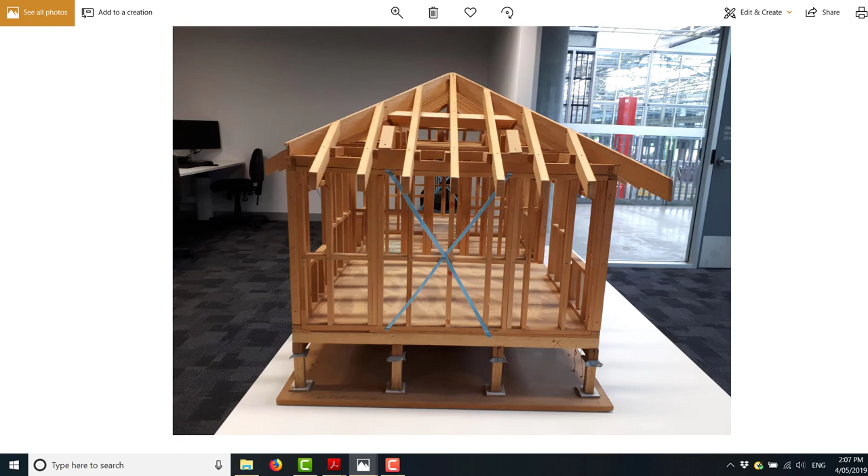Now, you should know this by now. These things here are rafters. These ones are your ridge board or ridge beam. Coming down the corner here, if you remember, the photos are of a hip roof. So this is a hip roof. Let's see if I can find a slightly better photo. There it is, a hip roof. This is a hip rafter, and these ones are your common rafters.

This one here is your hip rafter. What is supporting the hip rafter? Your top plate. From your top plate down to your stud to your bottom plate, that's where your wall framing is. From top plate to bottom plate, anything between, that's your wall framing - the timber component, that is.

Once you get past the wall framing, then you will have your floor, whether it is a platform floor or strip flooring. Then you've got your floor joist, here, this little bit here, which goes the whole length of the building, supported by bearers. Bearers are supported by stumps. Between the bearers and the stumps are ant caps. So the stumps, bearers, floor joists, and flooring form part of the floor framing components.

The last component we're going to be doing is the bracing component. See those blue straps? Those are indicative of metal straps that we will be using for bracing. I'll be essentially teaching you two forms of bracing - metal straps and hardboard sheeting. But we'll get to that later.

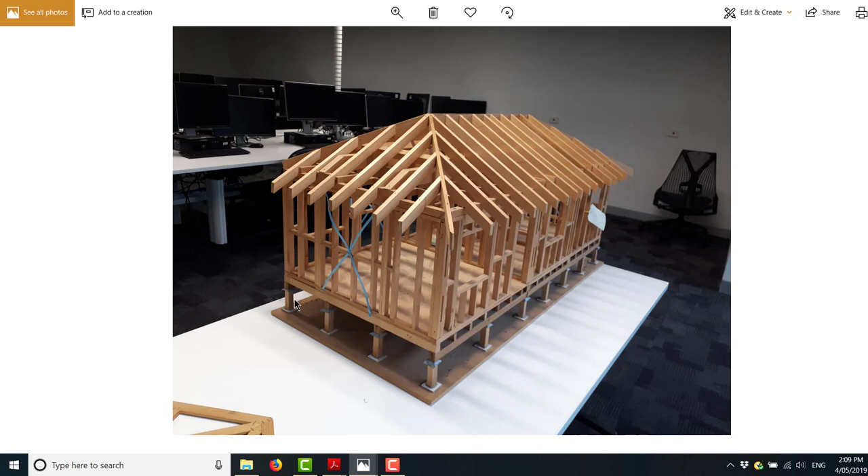Okay, so components of a wall framing. Wall framing starts from the top plate and ends at this bit here, the bottom plate. What I'm going to do is use this timber frame model. I also have photos of a single-story timber frame house and a 2-story timber frame house. I'm going to go through them, give you an idea as to how things work, to put things into more of a practical look. Okay, let's begin.

So we've got the rafters passing on the load to a wall stud, going down to the bottom plate, passing onto floor joists, onto bearers, and onto stumps. The whole point of it, if you remember correctly from our previous chats, is that the load of the roof and everything else is passed down in as much of a vertical manner as you can, all the way towards the ground. Right, so we've got the parts.

Top plate. Top plate always goes around the whole building on all the walls. Bottom plate here is similar, but you do not have your bottom plate where the door is - you'd trip over it, so you don't do that. See how it's in a vertical manner? So I've talked about that.

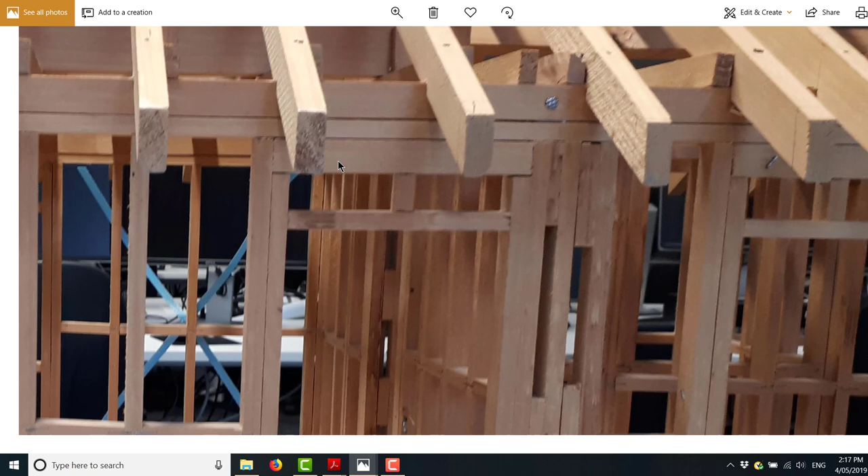The lintel here—how do we support the lintel really well? Using a secondary jamb stud right underneath the lintel. There's always a pair, one and the other. This is called a secondary lintel, secondary jamb stud. Next to the secondary jamb stud, there's the jamb stud.

Again, they come in a pair. This is a jack stud. We call jack anything when it is a shorter piece of what they're supposed to be doing. So this jack stud is essentially a smaller piece of a wall stud. So we call that a jack stud.

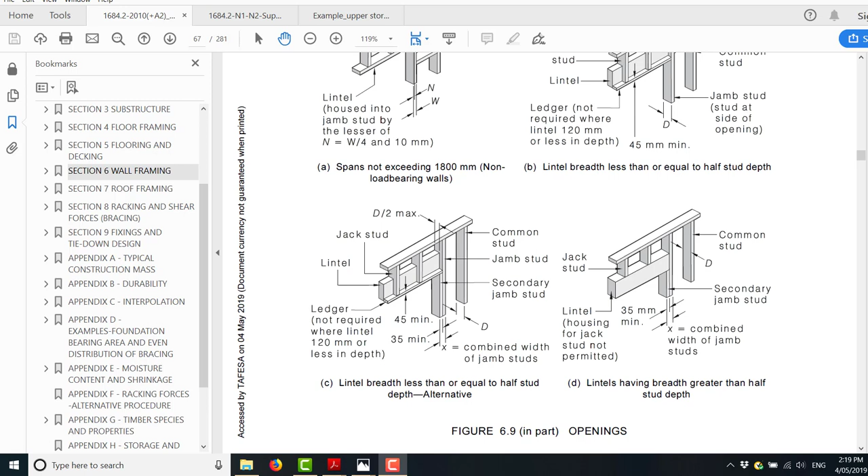And then we've got this bit. This bit is called a ledger. So where do we find the ledger bit? It's here, the ledger, right down the bottom, or it can be called a lintel trimmer.

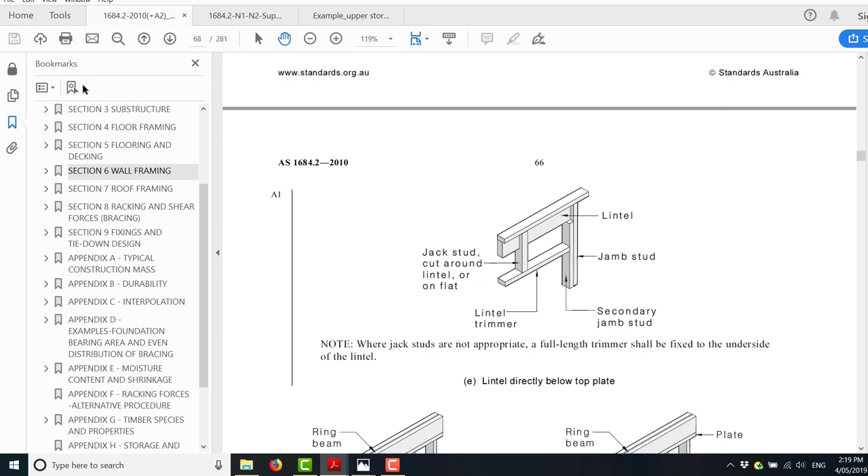So what is what? Go back up to terminology and definition, scroll down. This arrow is what we're looking at—it's called ledger. In the past it's also called a lintel trimmer, so you can use the terms interchangeably.

As with a window, don't know whether you can pick it out, but here's the window. It is similar—you still have to spread the load of the roof using a lintel onto your jamb stud going down.

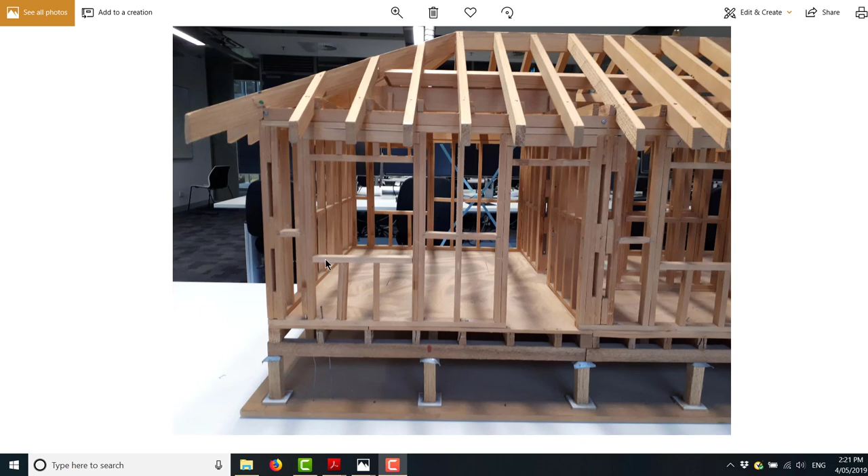Your secondary jamb stud right underneath the lintel, and next to it is your jamb stud. They come in pairs. That's your window sill trimmer, and that's your jack stud happening again. That's your window sill trimmer right there.

Okay, look up a bit. Window sill trimmer, clause 6.3.6.6.4: opening widths up to 1800, the trimmers can be of the same size and grade as the common studs in that wall. If it is more than that, then you look at table 6.3.

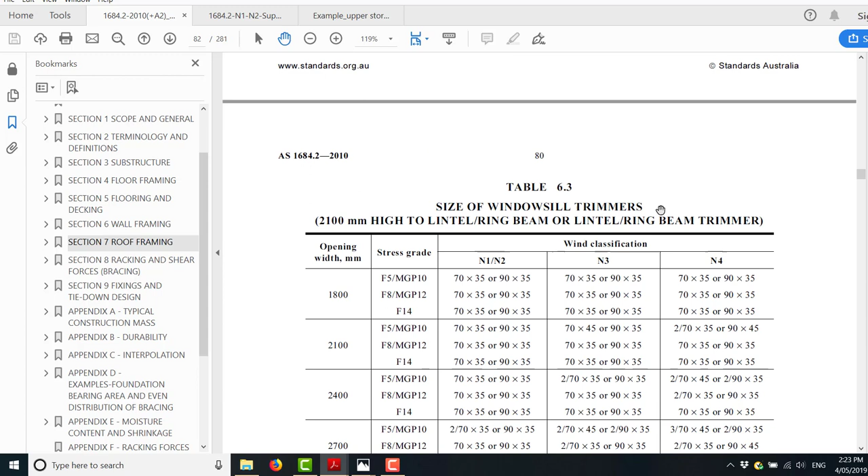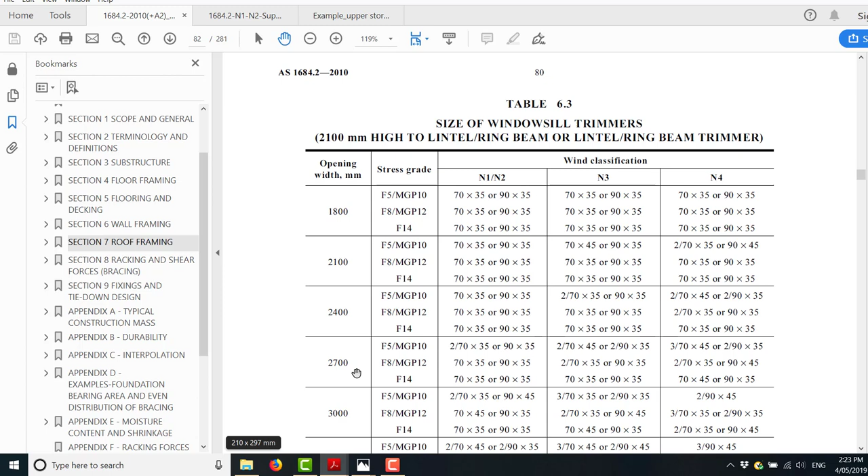6.3, here it is—it covers N1, N2, N3, N4. Assuming that we're sticking with MGP10, as you can see, 90 by 35 can be used for opening width up to 2700. Thereafter, the sizes increase.

Read the table and have a look. You should be aware that your 2/90 by 35, for example, is just two pieces of timber, dimension 90 by 35, and two of them laminated together.

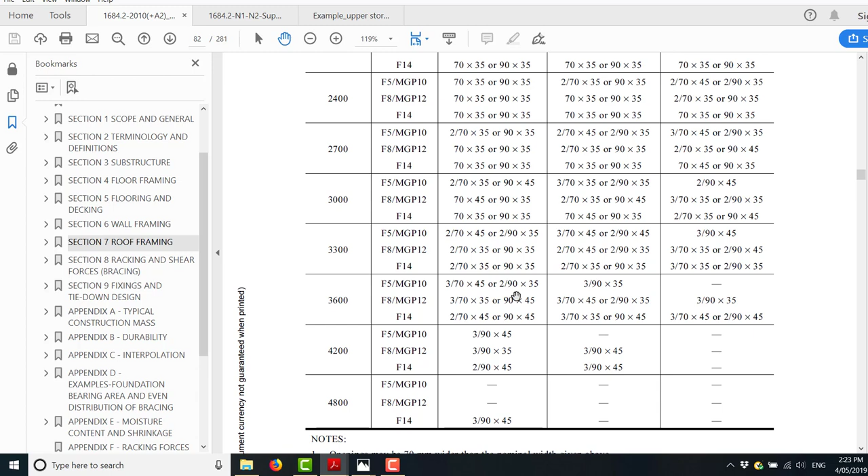Right underneath that, you've got the bearer going horizontally. On top of that, you've got the floor joist. I'm going to zoom in to give you a better idea as to what we're looking at. So you've got your floor joist there.

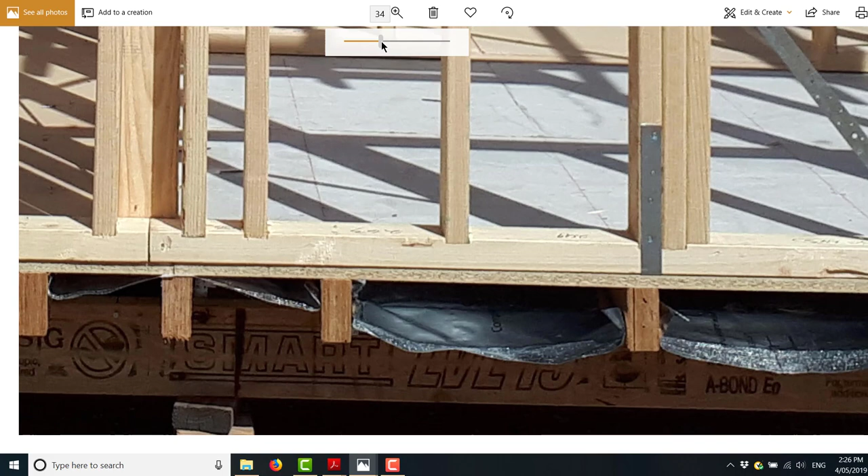Above the floor joist you have your studs trenched into the bottom plate. Zooming in a little bit more—so this is your bottom plate. In this case, the bottom plate has been trenched. Trenched means making a little channel into the piece of timber all the way through to the depth of it.

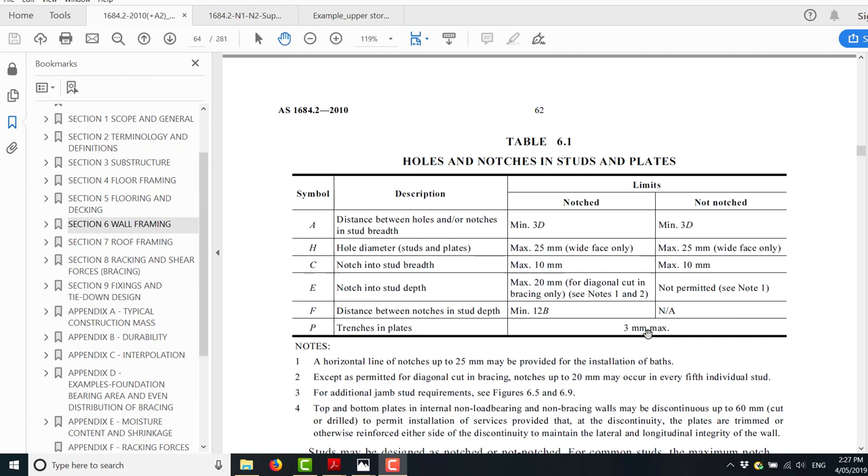Maximum trench of the bottom plate is, if you remember, 3 mil. Correct. How do we know it was 3 mil? Because of the standard table 6.1—permitted trenches in plates is 3 mil max. Bottom plate 3 mil max. It's not just the bottom plate, it's the same for your top plate as well.

So that was our bottom plate going up, the wall stud is going into the top plate. Zooming in, notice that it is also trenched. Trenching is not required, but it just sits that piece of timber so much better into where it needs to be.

Now, I don't know whether you can pick it out—can you see the truss roof right there in the triangle? That's the part of the truss roof. There's one here, and then another, then another one at the end. There's one there. Skip, that's the other roof—you can see by the nail plate.

So what's here, what's this bit? That will be for your ceiling joist. Remember, although the piece of plasterboard on the ceiling is typically 1200 by say 2400, you need the mounting points as per the manufacturer's specification. So you do need the ceiling joist to be there to help you for that mounting point.

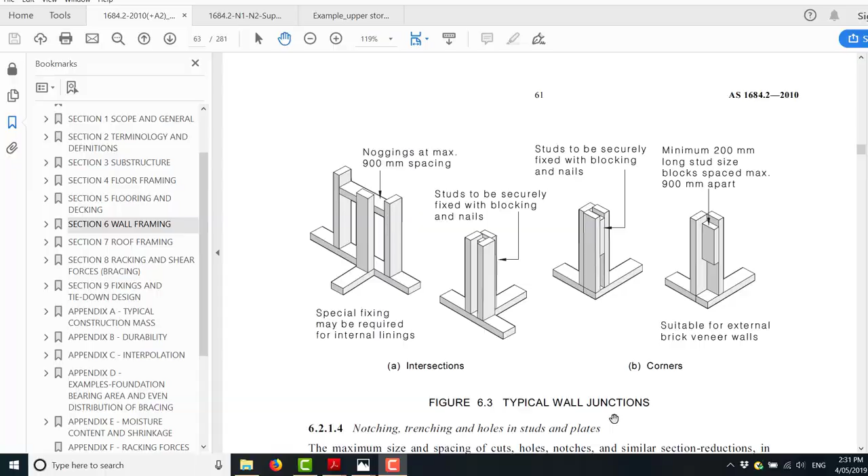So when you go out to site, have a look at what you've got there and compare that against the standard like I've just shown you. This is a corner. That's your blocking, and it's between the two wall studs.

I don't know how many of you have got your white card or have ever been to site yet. I'd encourage you to go and get your white card, and when you do, just drive by a site and you may be able to ask the site manager there to see whether you can go onto site. Do not ever go onto a site without getting permission. If you don't have permission, stay on the footpath — that will be your safest place to be. Be very sure of your surroundings, and keep a constant ears and eyes out for potential danger. Okay, take care of yourself.

What I do is, on my travels as I drive by, I go and stop, have a look, and say, oh, what's this? The best way to cement your learning is to go to site and look at what you've got there, then check the book. Chances are builders who are very good at cutting costs to make a profit will probably find some way to make it a little bit cheaper as well. So learn, observe, and learn.

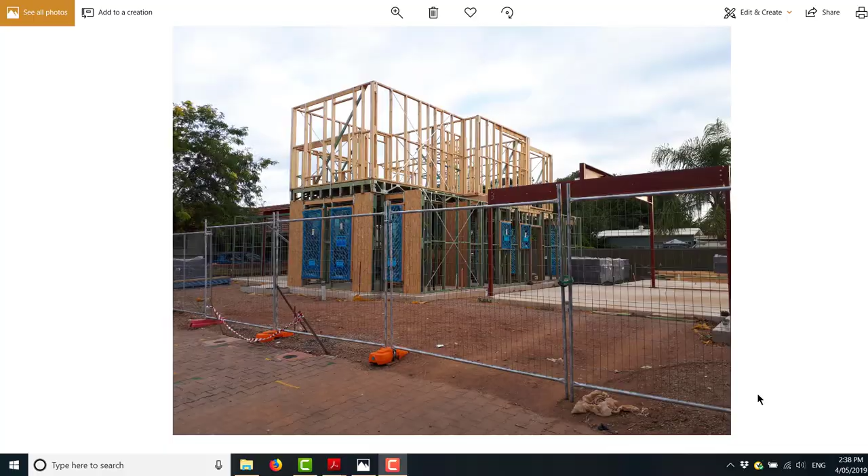This is the second story timber frame building that I spoke to you about. Two-story building.

Nowadays, timber frame buildings, by contemporary design, we seem to want more open plan living, so much greater sized rooms, and also double car garages. We can still use timber to span the 6 meters for your double car garage, but the timber beam would need to be quite big, so we tend to replace that with steel.

Okay, this building is on a concrete slab. The bottom plate is at the edge of the slab, right there. The distance between this edge to this edge is called a rebate.

This rebate is very much dependent on what kind of external cladding you're going to have on it. It could be AAC, aerated concrete, or it could be your brick veneer, so it'll be brick plus air gap - 110 plus your 40, in which case your typical rebate for a brick veneer home is 150.

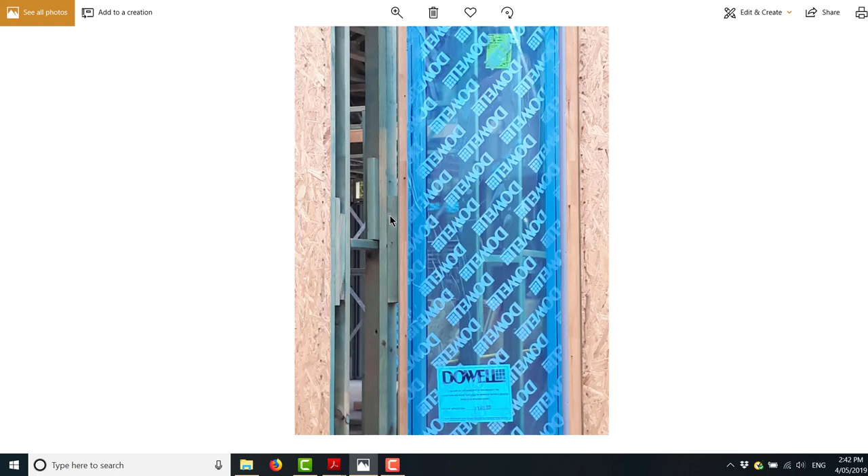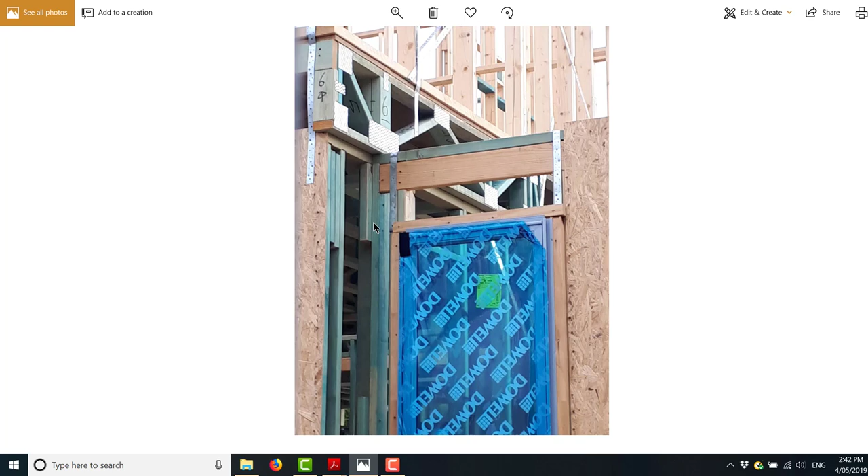Moving up the window now, just showing you where the noggin is. It is continuous all the way through, and at a corner with proper blocking as well. Again it is repeated, blocking your top plate. Remember it has to run continuous as much as you can for all the walls.

This is a wall opening, therefore it will have a lintel. It will have a jack stud to support it. It will be strapped down to secure it.

What is this? I'm going to compare this with my standard, just trying to get a sense of what that is. Before we do that, where is it located? It's located against this thin bit. That would be your platform floor, by the way, followed by your bottom plate and then your wall stud.

So we've got your top plate here, then something, floor, bottom plate. So what's this something?

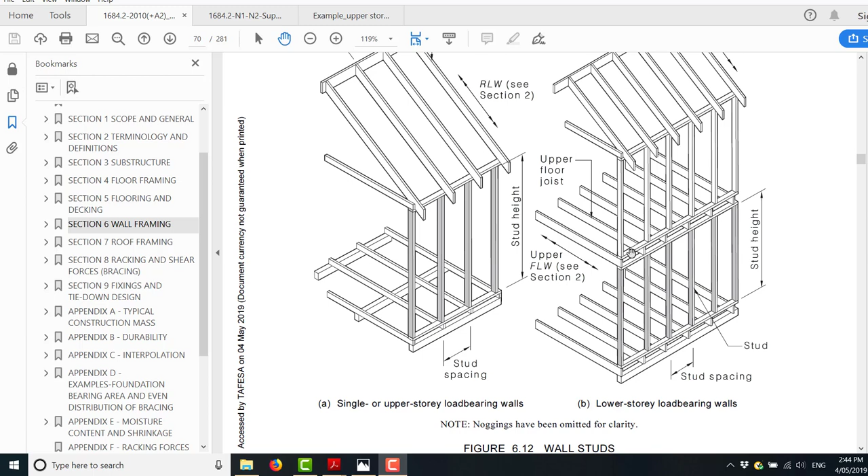Put this into a two-story building. Similar: ridge beam, rafter, top plate, wall stud, bottom plate. I'm going to expand this now, make it a bit bigger. Bottom plate, floor joist, and then your top plate for the lower level. Okay, top plate, wall stud, bottom plate, floor joist.

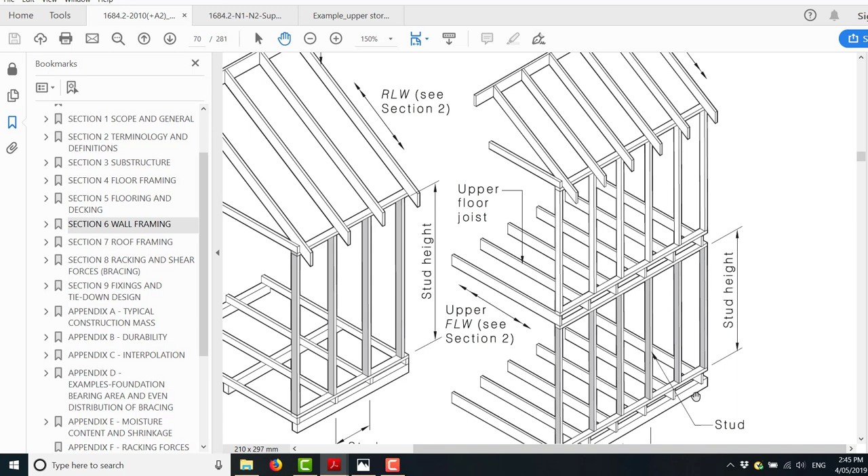Finished with that. So what's that bit in the middle then? That bit in the middle is called a floor truss. You can see by the nail plate, because that's a dead giveaway - there's definitely a truss of some sort. In this case, it is for the floor.

Its purpose is to hide services. Our contemporary homes nowadays use a lot of aircon, and aircon size pipes are definitely much bigger than just the depth of the floor joist. So we have floor trusses. Typical height of a floor truss is about 400, so that's where all the services are hidden.

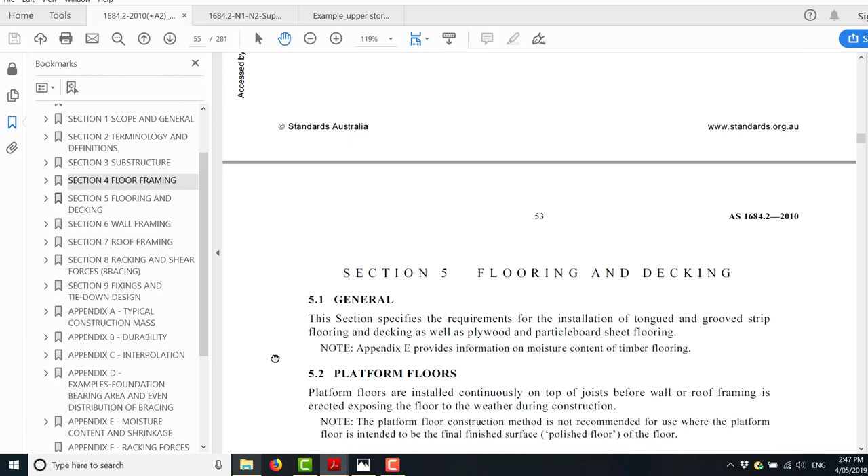But remember how it just repeats itself, okay? Top plate, bottom plate. We'll talk about that platform floor in a bit, just hold on for a moment. I know this is jumping ahead a little bit, but I think you probably should know about this. In section 5, flooring and decking,

it talks about different types of floor. Primarily, there are two types of floors: platform floors or fitted floors. Your fitted floors are typically your floorboards - hardwood floor, spotted gum, etc. Those would be your fitted floor, installed after the walls have been installed. Your platform floors are installed before the walls and the roofing is done. So that's where they belong.

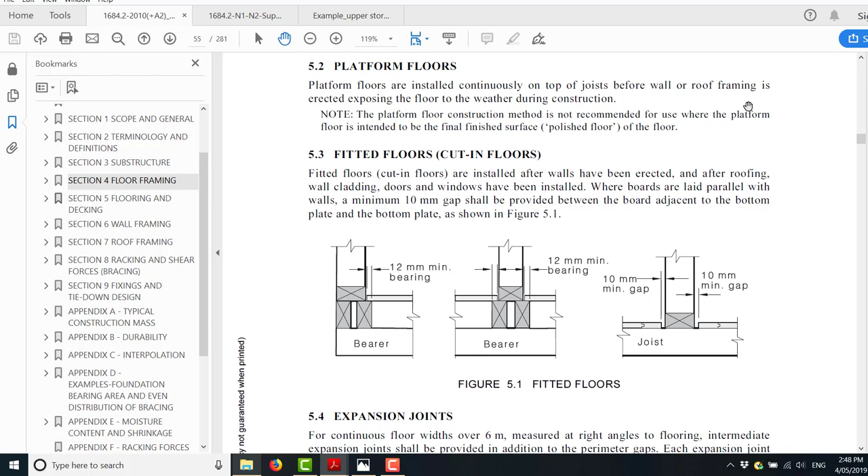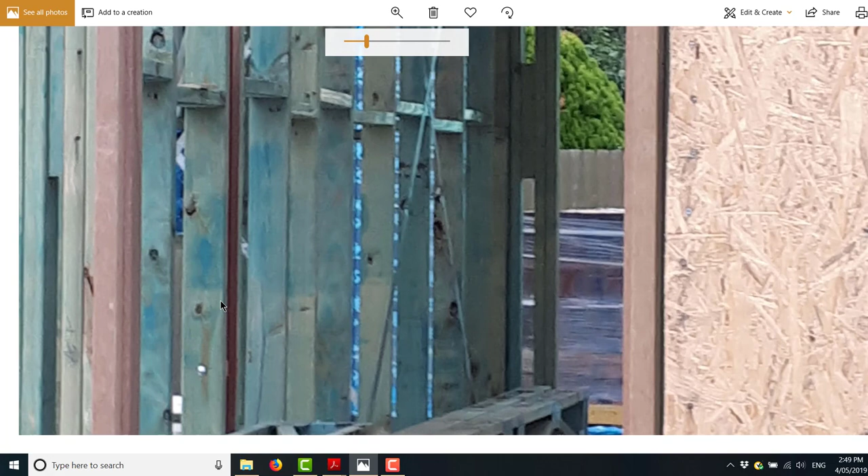This is a service pipe, soon to be enclosed in a brick column.

Yeah, that's how you lay it out. Scroll up a little more, can you see the rows of noggins? The maximum distance is 150 per the standard. Right here, figure 6.6 on noggin, maximum 150, and the distance between the top of the bottom plate to the bottom of your highest row of noggin is 1350. So if you work it out, the maximum height of a wall would be 1350 times 2, which would be 2700, and that's how we know your typical wall height is 2700.

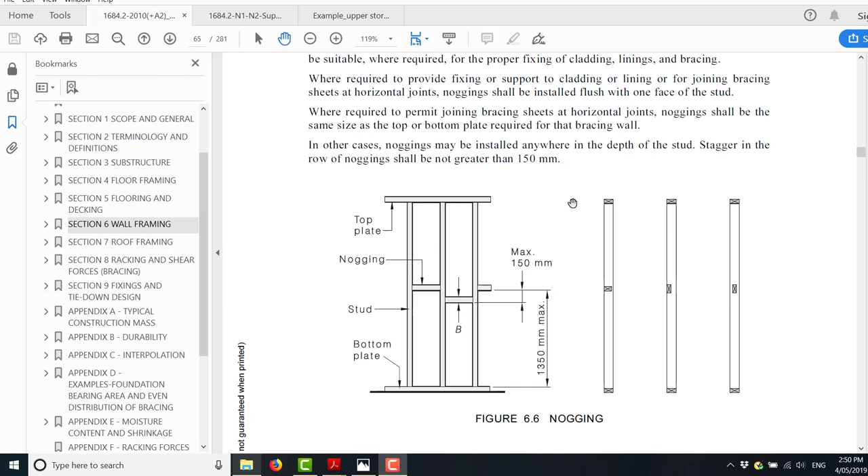So you only have one row of noggins if you install it very neatly.

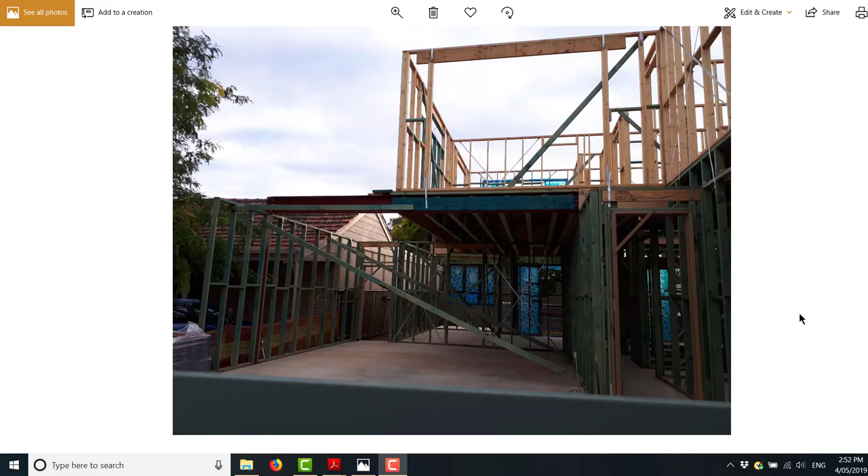So moving on a bit, what is this? This is a garage, isn't it? And this is temporary bracing - a very long piece of timber, making sure the wall is not going to fall over. You put a fixing there, and you probably put a fixing along the wall stud. You probably don't want to cut into the polished concrete floor - I don't think the owners would be very appreciative of that.

You can see a combination of your steel and your timber being used in a timber frame building. That's okay. You can also see how the bracing is done in a line - your load transfer is done in a line as much as you can, vertical line as much as you can.

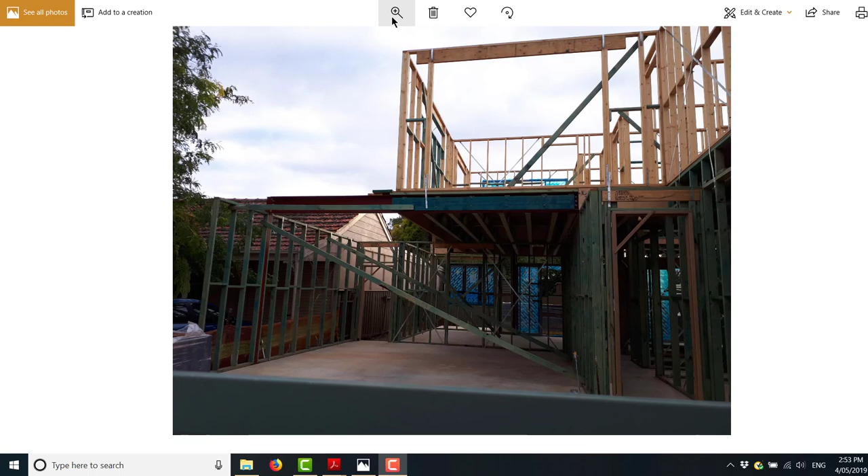Oh, what happened here? Is this compliant? What is this supposed to be? Well, first of all, it looks as though it's still under construction, and that's okay. But is it compliant as it stands right now? Let's have a look - so this is figure 6.9, it has 5 pictures on it, these 4 and the one over the page. And then there's rain beams as well.

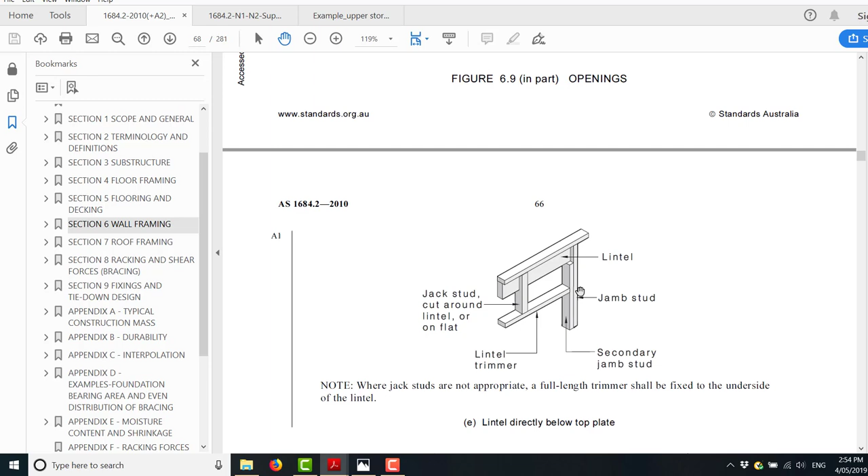So what's this one? You've got your lintel here that is not touching the next stud. You've got something being supported, and you've got noggins. Well, it's not that, because the lintel is not going to the next stud, so it's probably not that one either. Chances are it should be either this one or this one. I think what they were trying to do is this one, but it just wasn't done correctly, was it? Look at the lintel - it should have gone all the way to the next common stud. It didn't.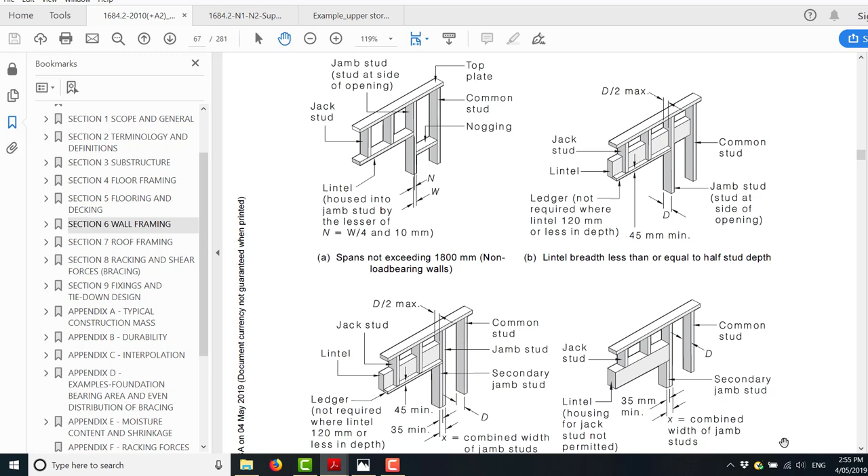Okay, have a look at it. And no, I didn't have a chance to go back and check whether they have fixed it. But as it stands now, if this was complete, I don't think that's right. This is how you're going to find out if something is right or wrong - have a look at it, check your book, and go from there. And there's obviously something missing here, but as I said, it's a construction site, it is not finished yet.

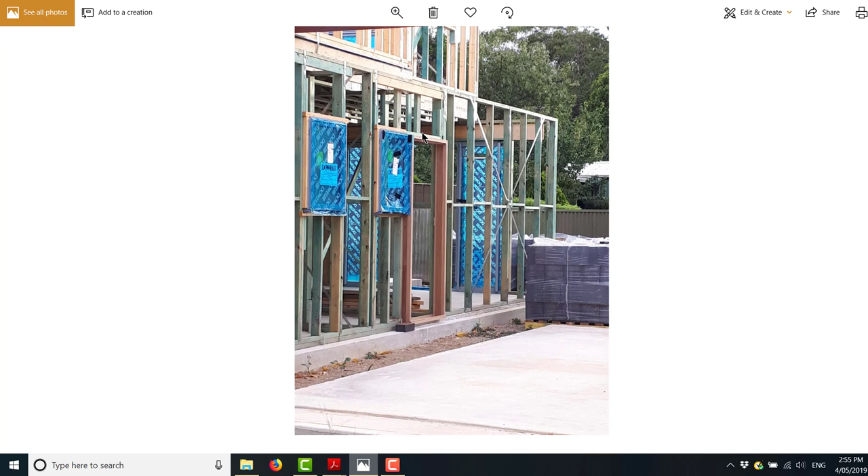This is your typical laundry window and door. The typical separation between those two is less than 100 mil. You will use a lintel across the whole lot - you won't separate it out, you just put it across the whole lot. And that will be your jack studs.

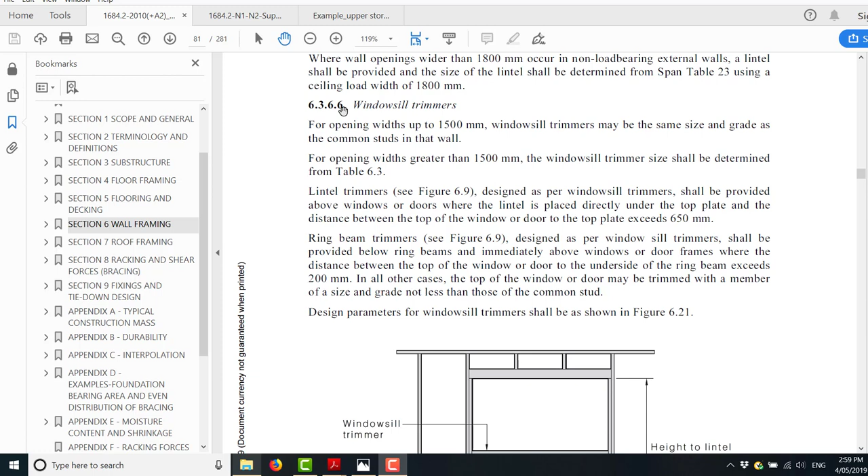So where did that 650 come from? It's here - Section 6, clause 6.3.6.6, third paragraph: lintel trimmers shall be provided if the jack stud exceeds 650 mil. Condition applies under this type of condition.

Okay, so how does that apply practically? You've got a habitable space of 2400. Typical height of a door is 2 meters, 2100 let's say. 2400 minus 2100, so that would be 300. 300 is less than 650, therefore a lintel trimmer is not applicable in this case.